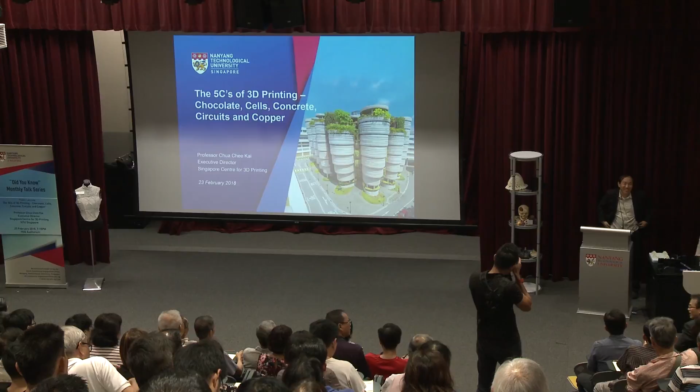So honored, even my junior college friends are here. We go back to 41 years ago, right, Chua? Where's Eng Lam? Oh, Seng is also here. Oh dear, did you bring the whole class here? So sorry, I told them about age already, 41 years ago. Oh yeah, Yang Ju is here too.

So thanks for coming. I hope your time here will be beneficial, that you'll learn something from us about 3D printing. Now, why I've chosen 5 C's is because, you know, when we were growing up, we all wanted our 5 C's.

Condos, cash, what else? Credit card, cars, and country club. So I'm trying to draw the parallel. Today, some of these things we can print. But I'm still hoping to print money, not yet. The moment I can print money, I won't be standing here, for sure.

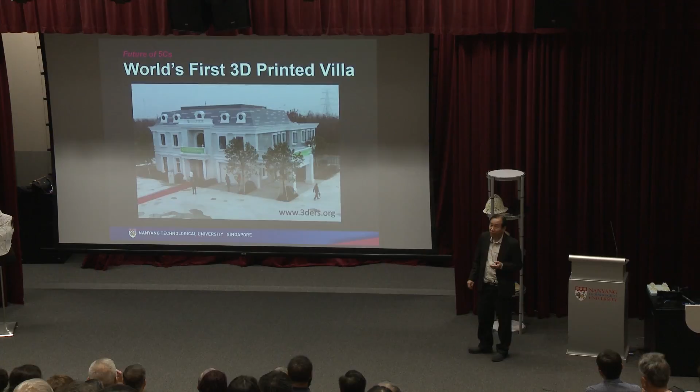Is it possible to print a house? Yes, people have done it. This was done a few years ago in Suzhou by one Chinese company. In fact, I went to see the chairman in Shanghai in 2013 because we just got funding from NRF, the National Research Foundation, at the time. So I was given one of my 3 programs, which is building and construction.

So the chairman, Ma, gave me a quotation in US dollars. Make a guess, how much is the printer he quoted me? Huh? 6 million US. So I shook his hand and said, thank you very much. I left Shanghai.

And that forced us to design and develop our own printers. Today we have 2 of our own printers. We have printed things. So next time you need a customized bathtub, come and see me, we'll print one for you. So this is one of the 5 C's, condo.

So what is 3D printing? We have a very broad cross-section of people here today. Some of you may not even be in engineering, may not know what 3D printing is. So I'm going to bring it down to hopefully your level. It is basically a group of technologies, not one single technology. There are more than 30 different types.

Printing chocolate is different from printing concrete. It's all different. That's why it actually takes more than an hour to explain all this to you. So bear in mind, there are more than 30 different types.

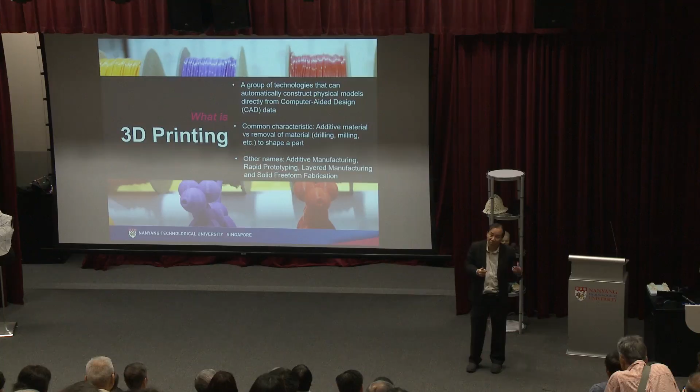What is common though is that you take the data from a computer. You use a software called computer-aided design, and from there you can design a 3-dimensional model. You can use the model to model a house or even a handphone. All things that are tangible, you can model it 3-dimensionally.

Now, before 3D printing started in 1988, there was other technology, namely machining. How does machining work? Anyone know? You have a bottle, let's say, as your design. How do you make the bottle? You take a block of material, you bring in a cutter, and you machine a lot of chips away to get what you want. This subtractive method generates a lot of waste.

Why not use 3D printing when you already have 3-dimensional data? Make them a layer at a time. It is actually very intuitive to use 3D printing because you take that data from the computer and then you manipulate it to make things a layer at a time. Think of anything around the world, everything is 3-dimensional, everything is made of layers, right?

Even a human being, I have skulls as well. This is not scary. Actually, the scary one is when you can print the real person's head, put it on the table, and when your wife comes back at night, sees your head on the table. And there are these kinds of printers nowadays.

They print really lifelike, this apple for instance. So this morning I had a group of visitors who came, I showed them this, and they thought I was really offering them breakfast.

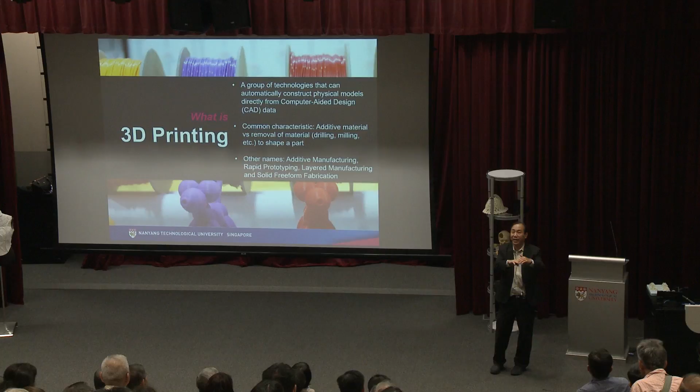So the chosen terminology was additive manufacturing, basically to describe this technology as one that adds things a layer at a time. Somehow, the media favorite is not AM. The media favorite is 3D printing.

Let me tell you a joke. A few years ago, I got my first funding from EDB, Economic Development Board, $9.9 million, and I set up the National Additive Manufacturing Center, AM, because that's the standard terminology. I used that name NAMC because in the US, there was an institute set up by ex-President Obama called NAMII, National Additive Manufacturing Innovation Institute.

So I wanted our name to sound similar to them, NAMC. Then another year later, I got a big grant for NRF, more than $100 million. This time around, I chose the opportunity to change the name of my center. So I fought very hard for the word Singapore. I got Singapore. I wanted institute, they don't let me use institute, so they said use center. Okay, I use center, Singapore Center. But then I realized I cannot use Singapore Center for AM, like my previous center named NAMC.

Tonight when you go back and sleep, you'll probably catch my joke. SCAM is a scam. Hence, I have to choose 3D printing, Singapore Center for 3D Printing. So if you can't remember everything I say, remember the name of the center: Singapore Center for 3D Printing.

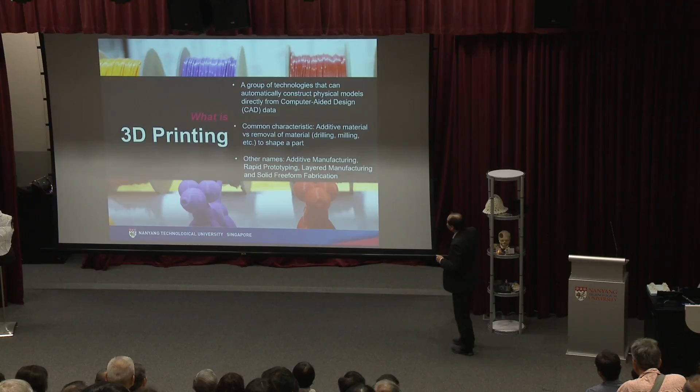Next slide. Now, I'm going to spend a bit more time here to explain to you. I can go on and on about all the advantages, but I just want to highlight 5 or 6 of them. Why is this technology so exciting? It's not a hype. It is seriously something considered by so many companies.

Let me talk about the first thing: making parts faster and cheaper without tooling. Let me show you an example.

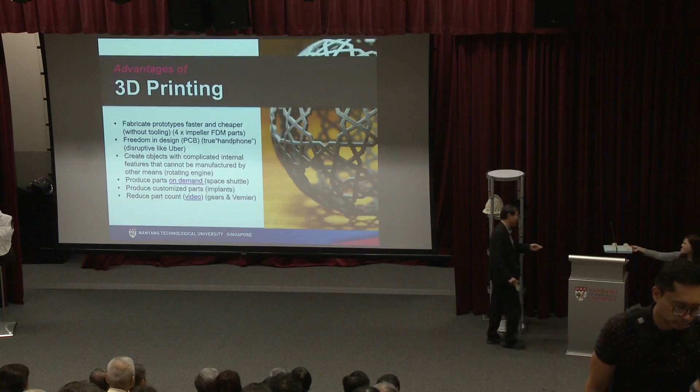Some of you in engineering may know that this is an impeller. To make this by the conventional method in machining requires a 5-axis machining center, which is highly complex, takes a long time to program, and worse still, in order to machine this, you need a fixture, something to hold it, because when machining, the forces are very high. To have a fixture, you have to design it, you also have to make it. Then you can machine it.

When you print it, why so troublesome? You just print it, and I can print 4 at one time, that's it. I don't even need something to hold it. That is the meaning of without tooling. You don't need a cutter, you don't need things to hold it, you don't need to make clamps, you don't need to make a fixture. And that is the advantage of this technology.

Next, freedom in design. Through the handphone example - do you know why your handphone is flat? Because of the printed circuit board inside, PCB.

Printed circuit boards are made by a technology called lithography. A printed circuit board takes about 10 layers, takes about 4 to 5 weeks to make one. The machines cost millions of dollars, but they can only make the thing flat, which is why all your handphones are mainly flat because of PCBs being flat.

So a lot of things we see today have the shape, the form they have, because of restrictions in manufacturing. Think about 40, 50 years ago, a car. Why were cars so box-like back then? Why not with aerodynamics? Does that mean our ancestors didn't know how to design? They didn't know about drag, they didn't know about aerodynamics? They knew - they just couldn't make it.

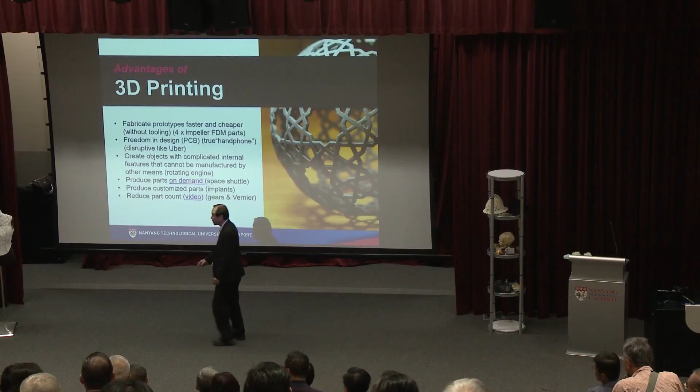Now I want to show you a complex part, right Joel? This is being controlled by my engineer here. This is also one of the very complex parts—an impeller. Almost everything is 3D printed except the motor. These are things aerospace companies are very interested in, because it takes a long time to make things like that.

Printing parts on demand—for instance, for a space shuttle. If you recall, two years ago there was a movie called The Martian. Anyone watch it? No? Our friend was stuck up there, couldn't come back. Fortunately he knew botany from his undergraduate course, so he grew potatoes and came back. But the other option is to bring a food printer with him, then print on demand—when you want to eat, you print, because food is perishable.

Right? Print on demand is a very exciting topic now. I'm going to show you another example. Click, please.

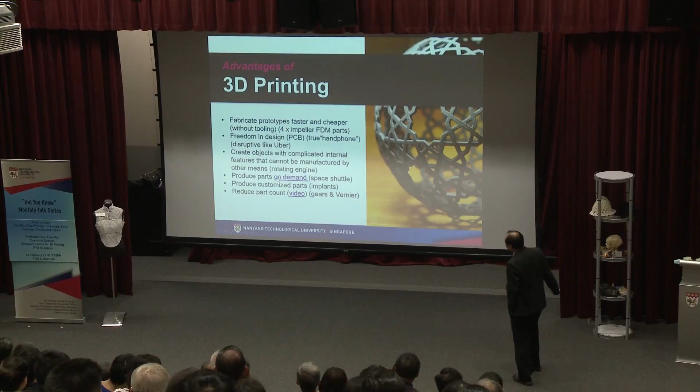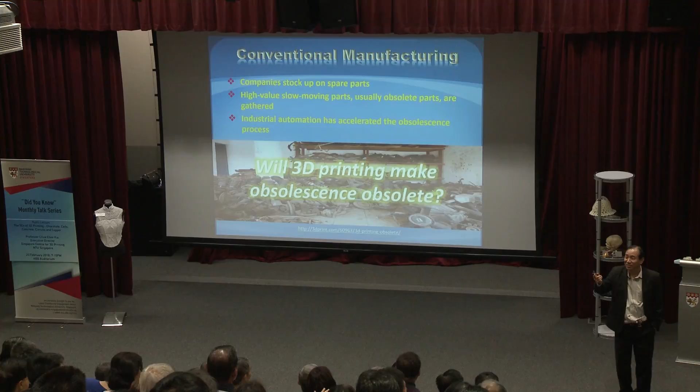I gave a talk a few years ago about this—spare parts. Will 3D printing make obsolescence obsolete? When we launched the center a few years ago, the next day a guy called me because he saw our center mentioned in the Straits Times. He said, Prof Chua, my washing machine just conked up, and when I called the manufacturer, they said sorry, we don't carry this part anymore, it's an old version. So it happens—so you print one part for me. Print on demand.

Right, next slide. A lot of companies have this issue. Same with the Singapore Army—they carry 300,000 different parts, from helmets to rifles to army tanks, in different versions as well. If you keep storing them, you take up a lot of space. So one of the very exciting things people are looking at now is: can I print on demand? If I need it, then I print it, reducing the amount of storage space needed.

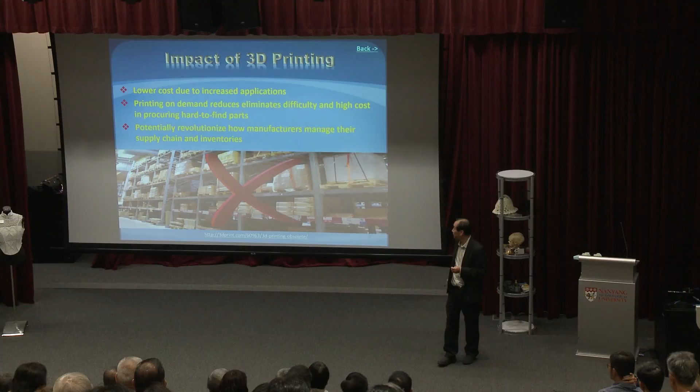Produce customized parts, implants. The world is going towards mass production and mass customization. Medical implants are one of a kind. This is for a hip, a project from a Fortune 500 company from the US—I signed an NDA so I cannot mention the name. This is titanium, lightweight, and customized for the patient. Medical is one big area because a lot of the things are one-off and totally designed to fit the anatomy of the patient. So this is a very, very suitable application for 3D printing.

Last but not least, part count. My view is this is possibly one of the most impactful examples.

Later you can come down and place your order—no, not for sale. One Russian minister came, saw this, was fascinated, and pleaded, so I gave him one. This set of gears, if I tell you it's printed, no big deal—but even top CEOs thought it was just printed, when actually it's printed in one go, fully assembled. That is amazing, 3D printed, full assembly. This vernier caliper—every single part is printed in the printer in one go, fully assembled. That is wow, all this in a single go from the printer. Metals and plastics. I'm going to pass it around, but make sure it comes back.

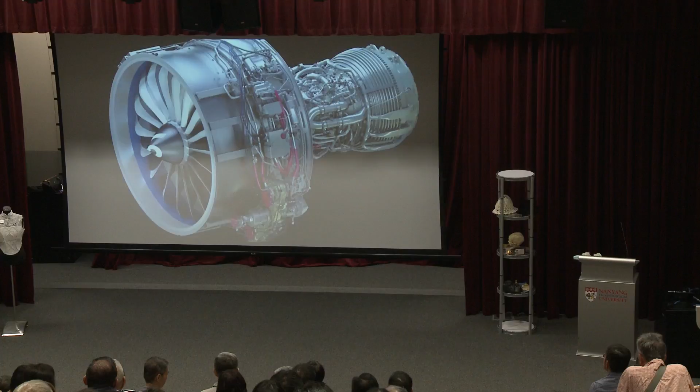In many regards, we look at this technology as replacing, in some instances, traditional technologies like castings, machining, brazing and welding. One of the exciting parts about the technology is we can combine multiple components that used to be brazed or welded together and make them into one single complex unit.

By 2020, GE Aviation will manufacture more than 100,000 additive parts for the LEAP and GE9X engines. In the next 5 years, GE will invest more than $3.5 billion in new equipment to produce advanced components, like additively manufactured blades and blisks.

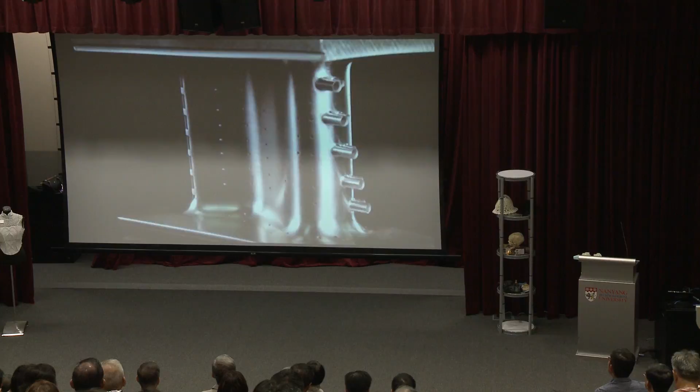To meet its record production backlog, GE Aviation is developing ultra-powerful laser beams and built-in inspection processes that could increase additive manufacturing speeds up to 20 times faster than what's possible today.

The gentleman you saw in the video, I met him in November. I visited GE in Cincinnati. In fact, we did a 1-week tour of Boeing and the FAA.

My mom just called again. Sorry. All right.

GE is basically a leading example of where the industry is going in aerospace. They have now committed the first $100 million to buy 30 printers to print 85,000 fuel nozzles for production.

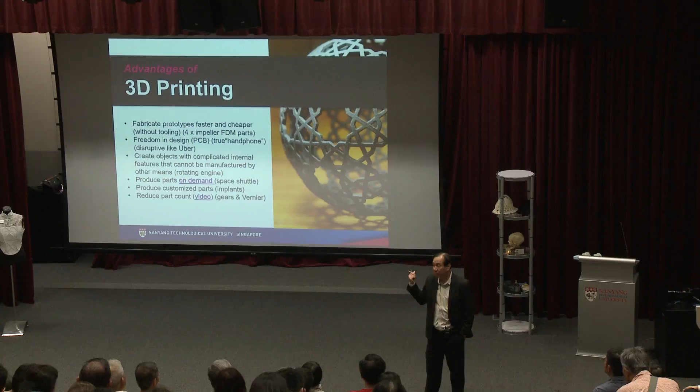So in future, when you sit in an airplane, you will have 3D printed parts. This particular fuel nozzle has already been approved by the FAA, so it is confirmed to be able to fit into the LEAP engine of the airplane.

In this video, the fuel nozzle has 18 parts. They redesigned it and now print it in one single go.

So when we were there, we asked him, what happened to the 18 companies that made the previous part? They said it's their problem. No more job, seriously. They are very ruthless. Out there it's like that. So the subcontractors are gone.

So it's really disruptive. But this 18 is nothing great, because when we walked into a lab, we saw another one: 800-over parts reduced to 20-over parts. Wow, that one is fantastic. I cannot take a photo and show you because they don't allow us.

But this is what's happening in some of the leading companies around the world, in aerospace.

Oh dear, my mom doesn't give up.

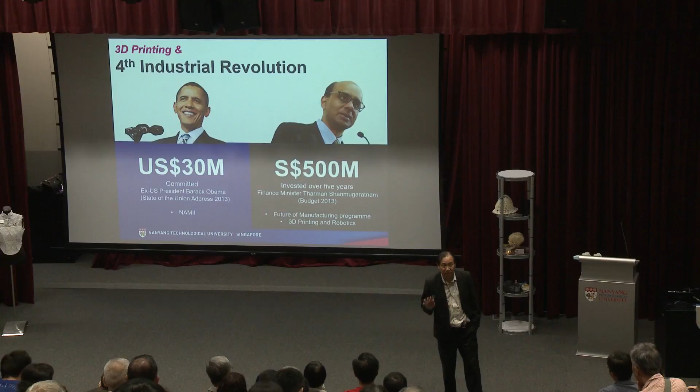Since then, many governments of the world have put in huge investments - China, Taiwan, Canada, UK, and so on and so forth, including us. So it is now really part of this fourth industrial revolution, among the many things like robotics, Internet of Things, cybersecurity, and so on and so forth.

Next, so what can we print? Almost all the different materials that you can see here, including even circuits.

I mentioned about PCB just now, right? 10-layer circuits and flexible circuits as well, so you can have wearables.

Most of what you see here, we can print in the center. Okay, next.

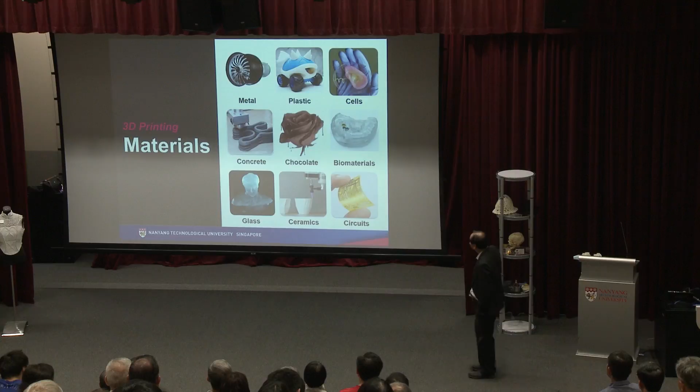Let's talk about chocolate. We have a chocolate printer here, but today I didn't bring any printer. Neither did I bring any chocolate. Play the video, please.

Earlier, I got a glimpse of the future with these unbelievable 3D printed creations: fashion, statues, medical implants. But Professor Chua has even more to show me. What could possibly be next?

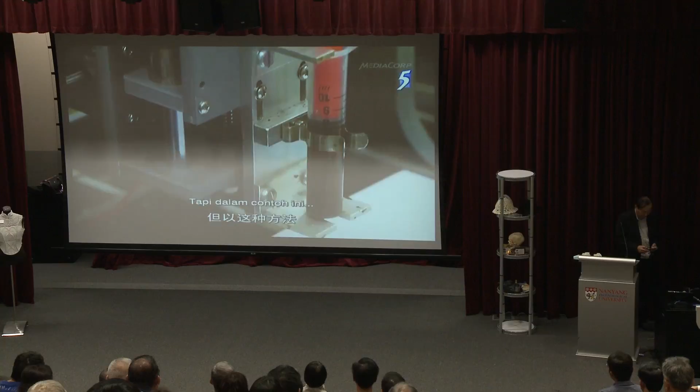Is this chocolate? Yes, and it's printing a design now. What's the difference between this chocolate printer and usual chocolate making machines? If you go by conventional ways, they usually need a mold to pour the chocolate in, so you have to make the mold. But in this instance, we print directly without the need of a mold.

Can you put any other ingredients in there? Well, in this instance you have only one syringe, but if you want other ingredients, or what we call other inks, you need multiple heads. Once you have multiple print heads, you can control each individually to print whatever materials you want on top of the chocolate.

So this actually looks like a prototype printer. Are you planning to sell this chocolate printing machine? Not yet, we still have certain challenges to improve it. If we can do multiple materials, it will be one of the first in the world to go into cake making, for instance.

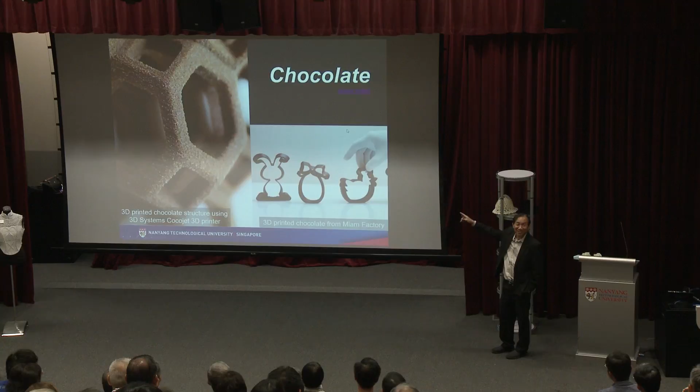Do you recognize her? Jiu San San? When she came to my center, she was the celebrity, not me. All my researchers asked for her autograph.

This was a program filmed 3 years ago called Secret Singapore. Anyone watch it? They came to our center, spent a whole day, and it ended up just 15 minutes. But not bad, 15 minutes on national television.

It's quite good. Now, we are also into 3D printing of food, but let me explain what people are doing around the world. Freeform design, they think maybe you can print decorations for cake. I don't know, they can do it.

Can we customize nutrition, amount of proteins, amount of vitamins into a design? I suppose we can as well. NASA is looking at long-term space travel. You need food, you print it when you need it.

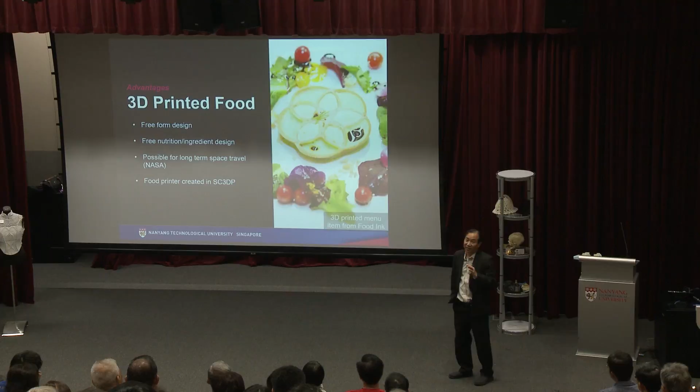We are also getting into the act of 3D printing food. We are developing our own printer. Next slide. This project was initiated by the chief dietitian of Khoo Teck Puat Hospital, Gladys.

She came to me because today stroke patients, as well as the elderly, have problems swallowing or digesting some foods. So if you can only eat porridge, your quality of life drops. What we're hoping to do is print pureed food, so there's no compromise on quality. You get your steak, potato and vegetables.

It also looks good and appealing. If you look at it, you actually can't tell it's pureed. So it looks good, tastes good. Have a look at the video.

The powder first. So this is pureed form. Is this correct? I have to do it a little bit because you didn't give me a dosing spoon.

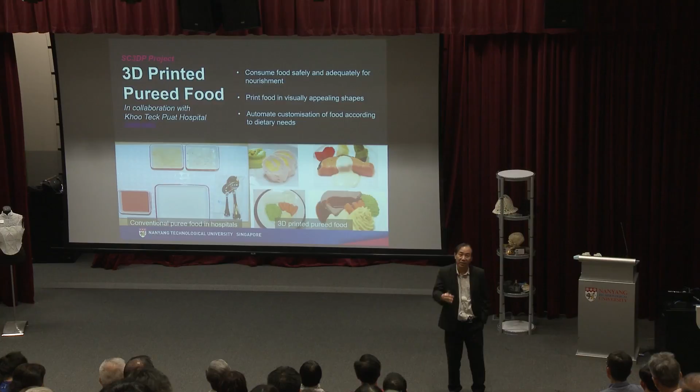So her vision is that hopefully in 2 years' time when we are ready, we are developing our own printer because we want to keep the cost down. If you buy printers from elsewhere, usually they cut your throat. So if we can get this done, we are even thinking of production in 2 years' time, supplying to nursing homes. If they need, they can choose from a catalog and we supply the food. So this will help address some of these issues.

Cells. This is possibly among the 5 C's, one of the greatest needs. Today, people are dying because there are not enough organs. They have to wait in long queues, and even then, sometimes the person dies, there's no match.

The organ is rejected by the recipient. So somewhere in the 1980s, the topic of tissue engineering came about, around the same time as 3D printing. Then in the 1990s, they kind of crossed, because 3D printing can help print some of these constructs, building an environment where the cells are so happy they multiply.

The idea is to take cells from the patient so there's no chance of rejection, but the environment, or the thing you want to print, can be designed and printed. Today we have a printer with 8 print heads. I can put living cells, biomaterials, growth factors, to construct this three-dimensional matrix of cells that allow and promote growth. This can then be implanted into the human body.

So we are doing things like cornea, cardiac, esophagus, skin. You want beautiful skin? We're doing quite a few of these. In bioprinting, we are ranked number 2 in the world. Later I'll show you some of these numbers.

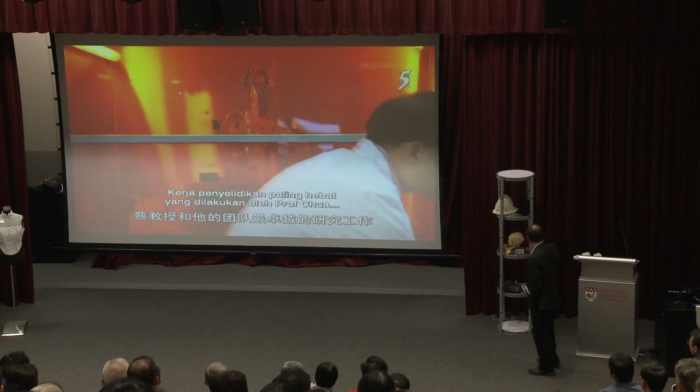The most remarkable research work being done by Professor Chua and his team is in the 3D printing of human tissues like cornea, heart, and esophagus tissue. If they succeed, it will be revolutionary, and the 3D printed human tissue could be used instead of animals for testing new products.

We can use it for making drug models to test drugs and chemicals on, and this will allow us not to use other types of living models such as animals.

The research team is exploring the possibility of printing transplantable tissues and organs, but they have some major hurdles to overcome. Right now, the main challenge is to develop vascularization. Those blood vessels are usually much smaller, and we can't really just print them out.

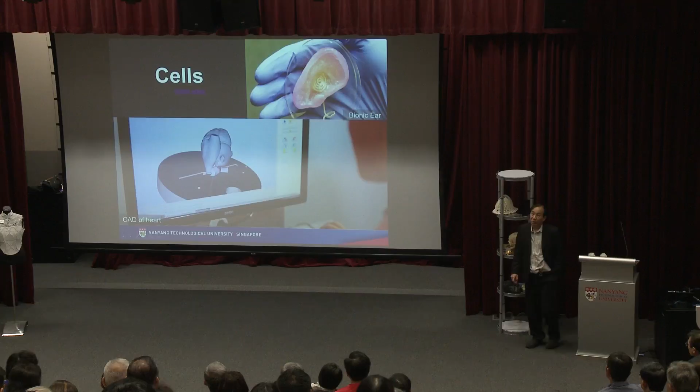Printing organs is very challenging. Printing something that looks like a kidney - it's not about the geometrical form, it's about the function. So we have to work with our friends from CELSI, the biologists. The doctors come in because of the endpoint application, whether you print a liver or another organ. The five major organs are the most challenging.

My estimate is probably not even in the next 15 years will it arrive. But the day it does arrive, I think there will be a lot of black market selling of organs out there.

This is our printer that we have, 8 print heads, cost us $1 million. And one of the greatest impacts, in my own view, is in drug discovery.

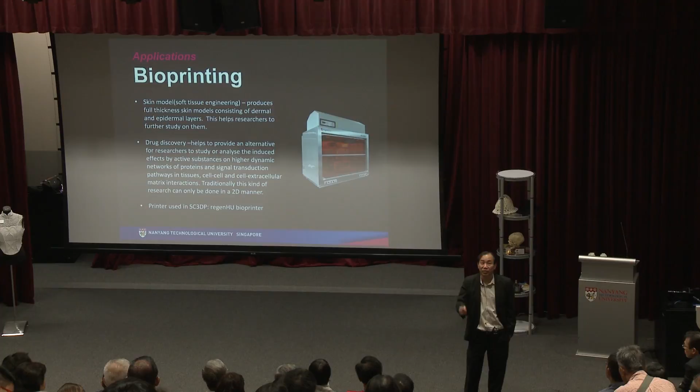Today, for every 50,000 drugs tested, only one makes it successfully. The process of testing drugs to make sure they're commercially available is very tedious and long, because they need to do animal and human trials. Our idea is perhaps we can use bioprinting to print the tissue and do all the necessary tests instead of the tedious testing process, which could shortcut the process, and hopefully new drugs will be introduced faster into the market.

By the way, recently one of my PhD students developed a new ink, and we've actually gotten a company interested to buy it from us. So that's one of the things where whatever IP we generate, we hope that we can get some income back.

Okay, concrete. So this is my colleague and his team.

If you need a bathtub, a swimming pool, or other things you want to print - Sembcorp invested $7 million into our center. Sembcorp has a unit that looks at design and construction, they have actual architects, very different from Keppel. Keppel Land is more about development, while Sembcorp actually develops houses. So they worked with us for 6 months to see what we should print.

Now remember, not everything should use 3D printing - don't jump into it and do things blindly. At the end of the day, it should still be cost effective. Yes, it's faster, it's nice, but it must still meet all your requirements. If you print a house that collapses on you, we're in big trouble, or you print a plane part and the plane goes down. So safety, reliability, and quality issues are all concerns.

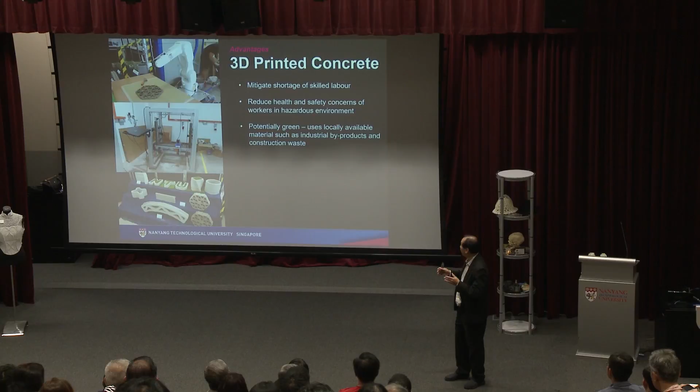In building and construction, we're now doing quite a fair bit of work. One thing you can see is that in Singapore, we rely heavily on foreign workers, and productivity in Singapore is low compared to Japan and America. This is something we want to address through automation, robotics, and 3D printing, hence this project.

So we have developed two printers, one using a robot, another a gantry system, and these are the parts we have printed. Let's watch the video.

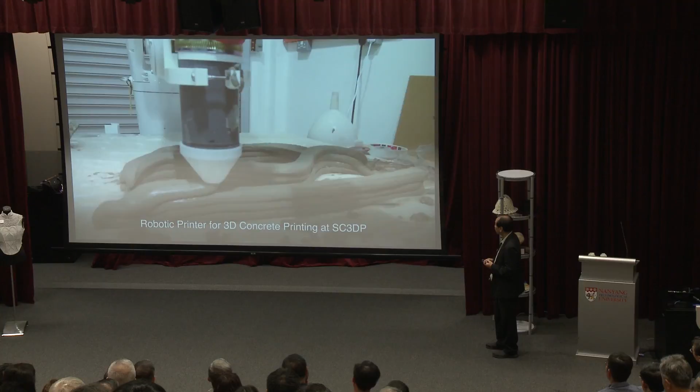All right, next - circuits.

This is the latest industry that we've added to our center. Even though it just started about a year ago, today we have about 12 PhD students working on this. We are printing things like sensors, antennas, and RFIDs.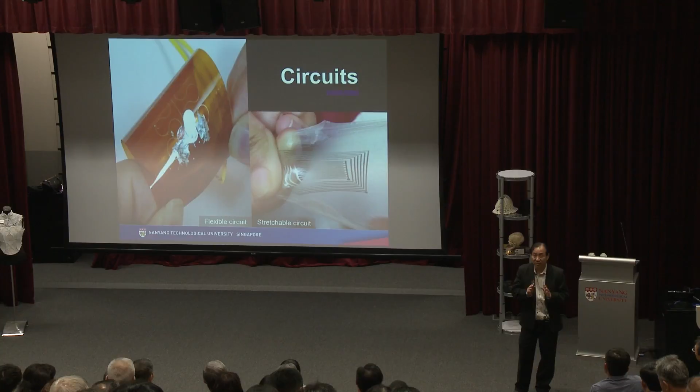But electronics is a huge area - there are still things like PCBs, transistors, resistors, batteries, fuel cells, a lot of things to print. Some are easier, some are harder. Right now we have 2 printers, and these are some of the things we've printed.

Flexible circuits, stretchable circuits - let's show the video. So this one is an antenna.

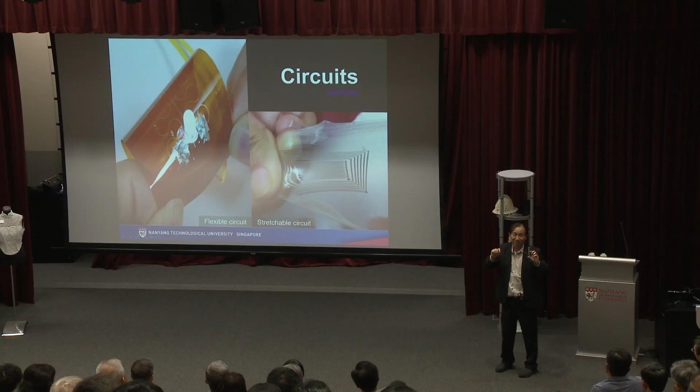Silver nanoparticle ink. If you contrast this and the earlier one, you can see the dimensions are hugely different. This one is nanoparticle, 10 to the power of -9. The concrete layer is very thick, probably a few mm, very different. In construction, being a bit off is fine, the tolerance is very big. But in some of these areas, even 0.5 microns is an issue. So different kinds of things you print have different requirements.

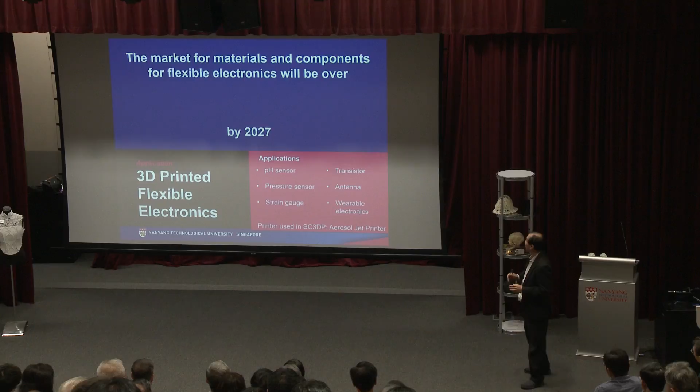And electronics is huge, 600 million by 2027. These are the kinds of things that people are looking at to print. Next.

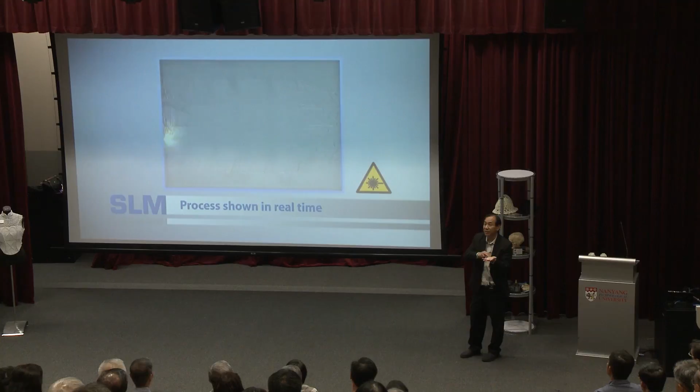See the laser running around? As the laser goes across, it's actually melting the powder, and the powder fuses together. This is how you get one layer. Very fast.

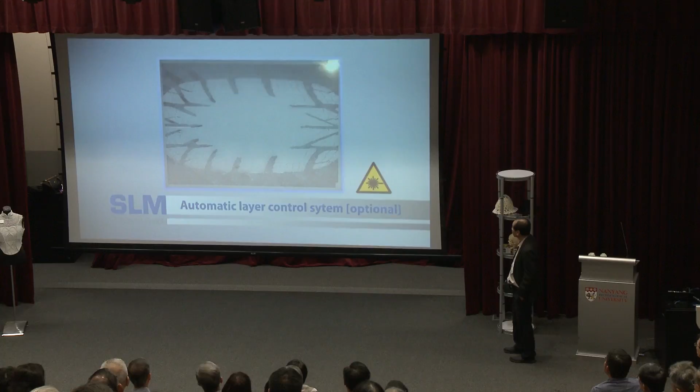So you see all this powder form? You remove all the loose powder, and that's the part that you print.

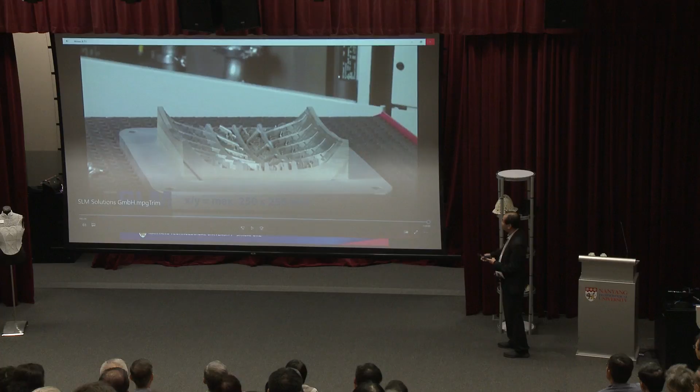So actually metal is the hottest topic in the last few years. It has advanced a lot. In the past, like 10 years ago, metal was nothing to shout about. But because it advanced so much, a lot more companies are coming into metals. In Singapore, actually, we make more plastic than metal parts. But the number of companies, number of PhD students, number of projects are in metals more than polymers, interestingly. So the world over, they are using metal machines to print all kinds of stuff: medical, nuclear, turbine blades, oil and gas, jet engines, so on and so forth. Even rockets. I visited a company in the US, they make rocket parts using additive manufacturing, 3D printing.

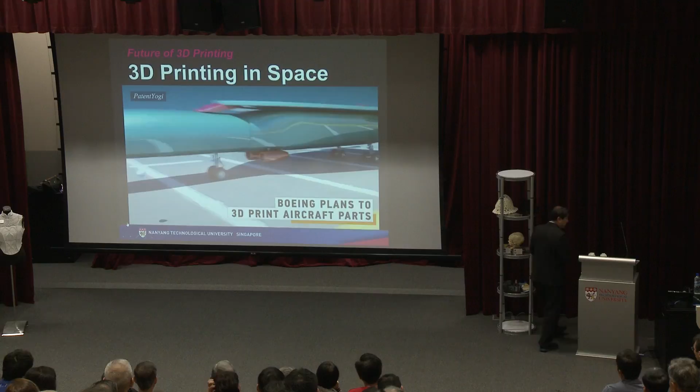4D printing, another very exciting area. You know 4D, on a weekend you queue up... that is gambling. Don't do it. If you want to bet on 3D printing, don't bet on 4D.

4D printing, not 4D. 4D printing is the combination of three-dimensional printing and what? Anyone knows? Time, that's right. The fourth dimension is time. The materials we use are shape memory polymers or shape memory alloys. This material has a special characteristic: if you subject it to certain stimulus, it transforms from shape A to shape B. So you can actually pre-program it. Then you can use heat, moisture, acidity, or one of these stimuli to transform it. Very exciting. Some years back, a journalist asked me, what's the application? I said, okay, when I lie down on my sofa, it detects my heat, and it transforms to fit my anatomy.

But this one is for fun. The real one, for instance, is a smart sun shade. Put it at the office. When it's very hot, it actually moves to limit the light coming into the office. Then when the sun sets, it goes back to its original shape. No need to use your hands, no need to move the blinds, no need for energy, no electricity. Government loves you.

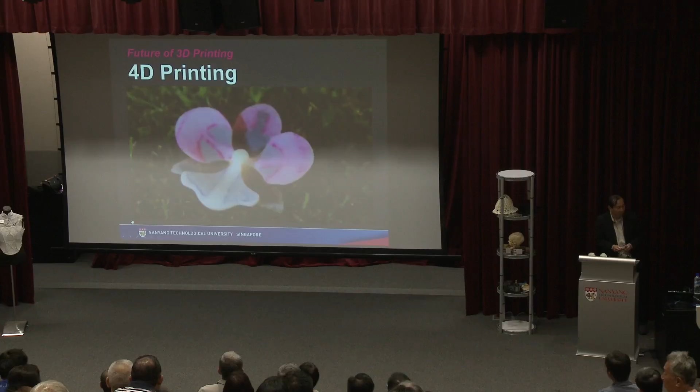When we first started this work about 3-4 years ago, the earliest center we launched had as guest of honor Minister Lui Tuck Yew, who has now left politics. He came, we gave him a polymer, he put it in hot water, and it straight away changed into the letters NTU due to the heat from the water.

Single, almost like two-dimensional - if you think of a piece of paper, I can design it such that it forms different shapes, like origami. This is what the flower is. You can actually sequence the way it forms - it moves here first, then moves there. And all this can be done by 4D printing. So actually we use multiple materials, different materials that react differently to the stimulus of heat. So you can program one shape into another shape. If you stretch this to the limit, it's like Transformer, the movie.

So this is another very exciting thing that people are doing. We are doing the science to understand the behavior, and if possible, quantify it, and then you can look for applications.

Next - well, we are a university, so we have a lot of undergrads, and one of the things we do is competitions, since students love competition. This was some years back - they took part in a competition. They were thinking, why not 3D print part of the car, not the entire car, just the shell. We used a very small printer, the one at the back, and that's why we had to print 150 pieces of it and stack it out. Guess what - my colleague became famous. He was interviewed by CNBC, CNN. I'm going to show you the video, hopefully it works, from CNN.

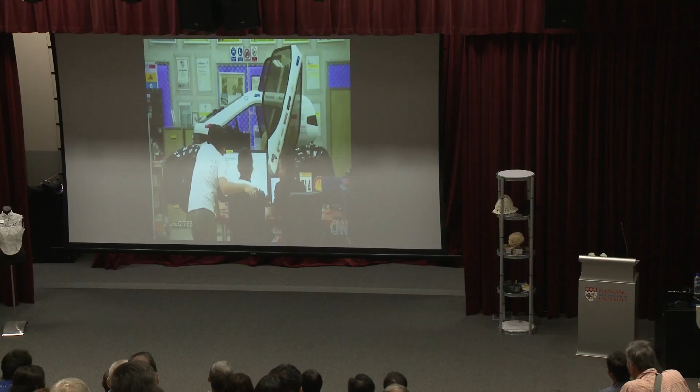The final leg of our journey across Singapore takes us back to school. The students here are mostly engineers, but this is no ordinary classroom - instead, it's a place to experiment. The general rule of thumb: the more hands-on, the better. It's not a full-time project, it's like a project of love, really, and a project for the future. A solar-powered electric car designed and built entirely by students. The team at Nanyang Technological University has done this before, but for their 8th concept car, the NV8, instead of ordering the parts, they printed them.

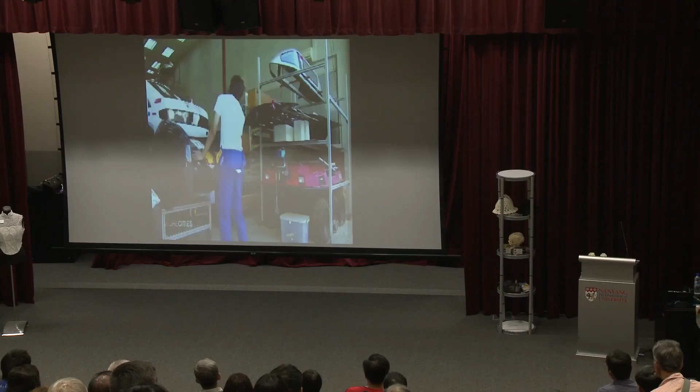So anything white - some of these components are also 3D printed. Basically it's the cabin, if you like. It's a process that required extreme precision with 150 pieces of custom printed plastic, but also extraordinary patience because the printer took 3 months to finish the job. Is 3D printing a viable way of building a car? We wish they could print one piece, like this front piece, but you'd need a bigger machine. Still, the plastic combined with a carbon fibre base means this car is extremely light, about 120 kilograms without the driver - perfect to go up against energy-efficient rivals dreamed up by other universities across Asia.

Oh, you stopped it - you don't have the next part where you drove. Oh okay, actually the video went on to show the CNN guy driving the car in our sports complex.

He survived. His only complaint after he drove one round was he asked, where's the air conditioning? It's too hot. Anyway, this was one of our earlier ventures, and at that time, because we only had a smaller printer, we had to print many parts. Now we have a much bigger one.

Next, let me share a little bit about my center. So in terms of the 5 Cs, I think we have done almost all the different Cs.

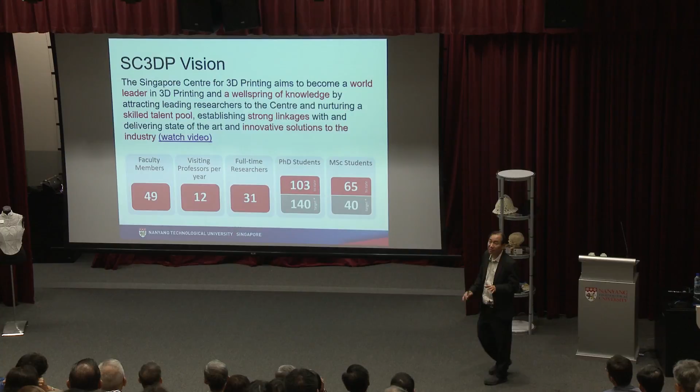The Singapore Center for 3D Printing aims to be a leader in 3D printing worldwide - not just good in Batam, Johor and Singapore. We hope to be well known all over the world.

We have a video as well? Okay, let's show you the video.

The Singapore Centre for 3D Printing, or SC3DP, funded by the National Research Foundation, the Nanyang Technological University, and industry partners, aspires to be the world's leading research institute in 3D printing, achieving prominent breakthroughs in research and development of innovative 3D printing technologies, processes, and materials. This will be done by attracting leading researchers, nurturing a skilled talent pool, establishing strong linkages with industry, and delivering state-of-the-art solutions.

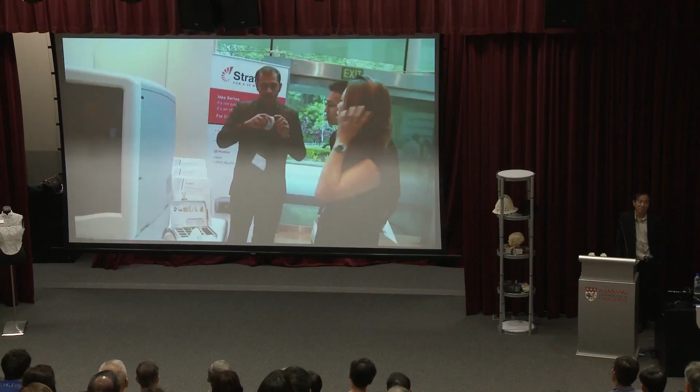SC3DP will consolidate all of NTU's existing competencies and strengths in 3D printing for manufacturing and precision engineering industries. Led by a strong team of professors renowned in 3D printing and supported by more than 30 faculty members with different expertise, it has 3 key research capabilities: modeling, materials, and design. The center also houses a wide range of facilities and equipment and has received strong financial support from the government to further its research.

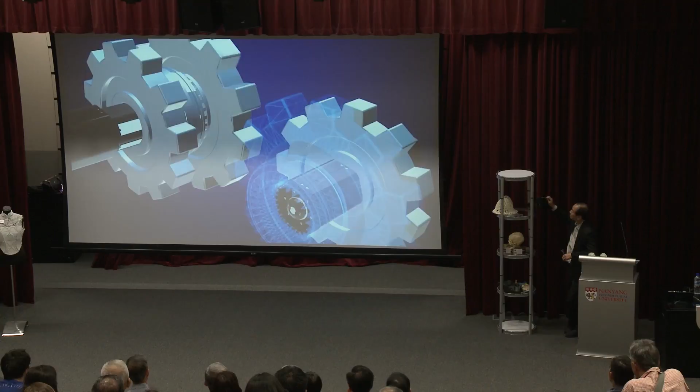In collaboration with industry partners, SC3DP will focus on key industries including aerospace and defense, building and construction, marine and offshore, and future of manufacturing. The center also actively collaborates with local and global partners, from equipment and materials manufacturers, software companies, to certification bodies.

In 2013, a 5 million Singapore dollar joint lab was set up between NTU and SLM Solutions Group AG, which aims to develop the next generation of metal 3D printers.

SLM Solutions, as the technology leader, is very proud to collaborate with NTU, Nanyang Technological University. We decided together to form a joint lab to have research and development. The common research is especially of high interest for the aerospace, automotive, and energy industry.

We at UL are delighted to partner with the Singapore Center for 3D Printing. We selected the Singapore Center for 3D Printing because of the infrastructure, resources, and the commitment from companies to advance 3D printing. There's a lot of research that's needed for us to understand the science and the safety behind the materials and the processing of 3D printing.

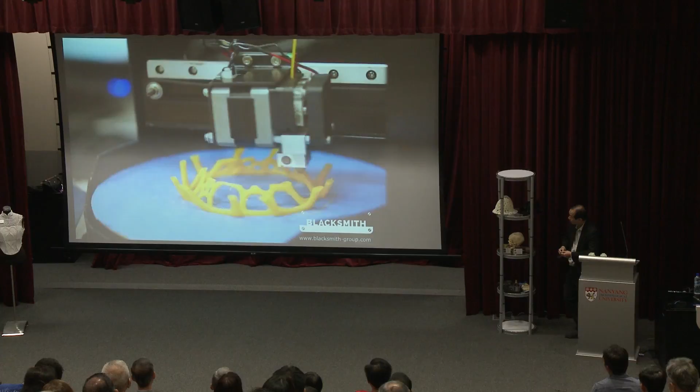Besides working closely with industry, SC3DP also prides itself on developing spin-off companies and products. Blacksmith Genesis is a spin-off product from SC3DP, invented by the Blacksmith Group, Singapore's first all-in-one 3D scanner, printer and copier. The centre organised 3 firsts in Singapore in 2013.

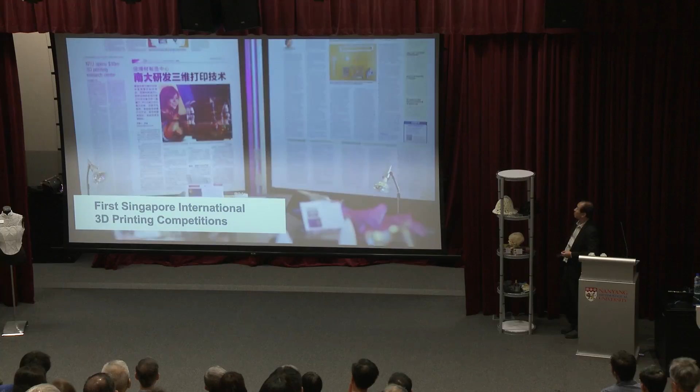The first 3D Printing Festival, the first Singapore International 3D Printing Competitions, which saw a total of 30 entries from 7 countries, and the first 3D Printing Fashion Show, which featured competition submissions and fashion pieces from renowned designers.

With its mission to train a pipeline of researchers and practitioners for sustainable growth, SC3DP offers a range of postgraduate programs supported by NTU School of Mechanical and Aerospace Engineering. The centre aims to train at least 100 PhD students and 27 full-time researchers in 10 years.

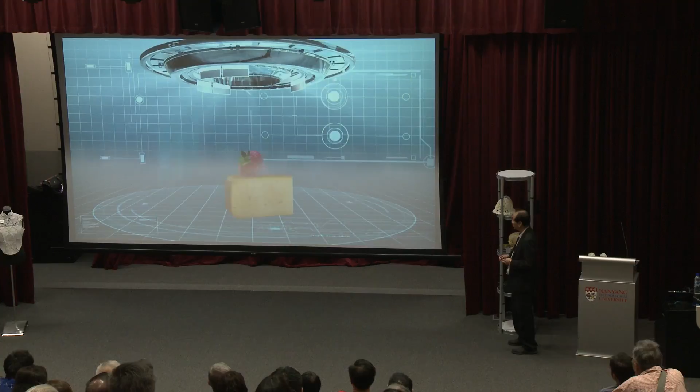The research work at SC3DP will bring about endless possibilities in 3D printing, or even 4D printing. Cars, clothes, food, medical implants, human organs, smart structures, printing in outer space, and unimaginable applications can be researched upon and 3D printed in the near future. The Singapore Centre for 3D Printing, printing the world and beyond.

We have today in the center 49 professors where we draw faculty from all over the campus. We have people working in construction materials, helping us with the building and construction program. We have people from biomedical working with us in bioprinting. We have material scientists who help us with all the formulation of materials. So the idea is that while there are colleges and schools, there are no boundaries. Any prof can work with us in the center.

We also bring in visiting professors. There are some people who will not join full-time, but don't mind coming for a short period of time. This community is not that large - we almost know everybody after 28 years. These guys will come for a couple of weeks, we pay for them, they spend some time, hopefully to inspire our researchers. So almost all the top gurus in the world, we know each other.

Full-time researchers, we have 31 of them, mainly postdocs. PhD students, right now we have 103 PhD students, concurrently doing all work on 3D printing. This statistic alone should make us the largest center in the world.

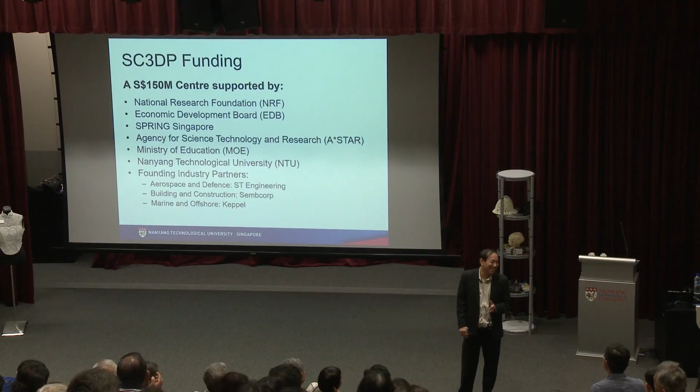But I'm still very poor, I don't know why. Anyway, we have a lot of funding from government, but also from industry. Out of the 150 million, 30 million is from industry. These are our three major partners, very specific areas, we get them involved. Later I'll show you some other companies from around the world as well.

These are all the printers that we have. Today there's no time to show you, you did see some in the videos. But should you want to come back, let me know, let my girls know, let my guys know, we will arrange for you. Don't worry, I don't charge you. Come and visit. The machines are very expensive - no point buying expensive toys and they become white elephants.

It is important for us to work with industry. So the government has already invested, we will use that machine to do your project. So that's our in-kind contribution. So if you have a problem, come to us.

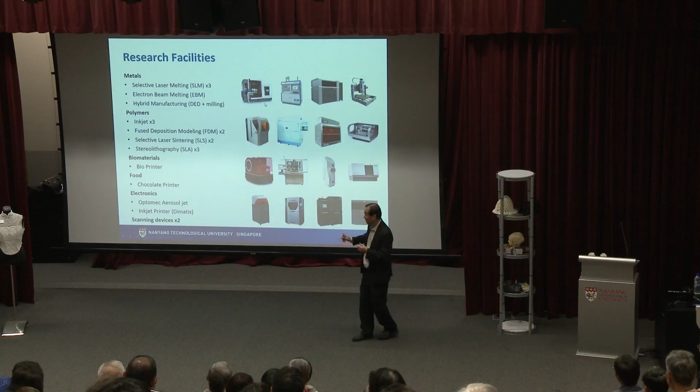I can tell you how expensive this machine is. Most of them are 7-digit. Only the chocolate printer is 7,000 - just 7,000. When 7,000 is compared with 7-digit, 7,000 is very cheap, right? Very expensive machines - that machine is more than 2.5 million, that one is 1 million, this one is 1 million, that's 1.8 million, this is 2.5 million. They are all very expensive machines.

The lifespan of the machine is very hard to estimate because they are all so different. But let's say the first one I bought in 1990 - that's the year I started my journey in 3D printing - we used it for 8 years, the SLA. 500,000, 8 years, hundreds of projects. Worth it. So different machines, different lifespans.

Now there are also very cheap printers out there. As the Chinese saying goes, 一分钱一分货 - you get what you pay for. You can buy from Taobao a $300 machine, but don't expect it to function like the $3 million machine. If you can make it work like that, tell me, I also want to know. So bear in mind, if you can print nice titanium, let me know. These are the real industrial grade machines, otherwise the companies will not come.

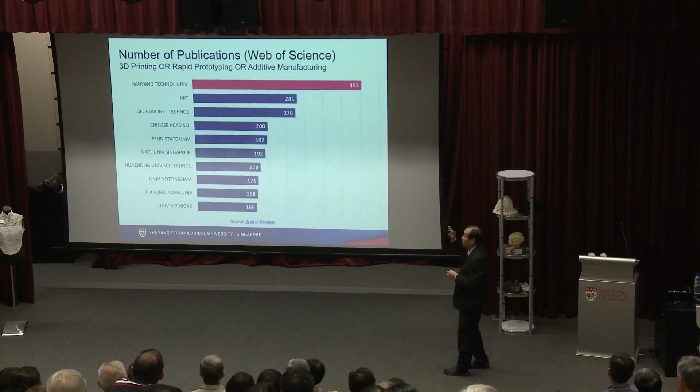Oh, by the way, what you see are commercial printers. What you don't see are printers that we develop - that one we don't show you. And sometimes companies give us money and tell us not to do anything public with it, so it cannot even be open public domain. I'll show you some examples.

Now, I hope you don't mind we do a bit of bragging. After, they can bash me up.

In the world, if you look at publications in Web of Science, the de facto database, and you use the 3 keywords - in the early years it was called rapid prototyping, later it was formalized as additive manufacturing, but today everybody prefers the word 3D printing - use any 3 of these keywords, search in the database, NTU is right at the top. We are more than double our friendly neighbors down the road. But I don't push them down because I got 2 degrees from there, more than here.

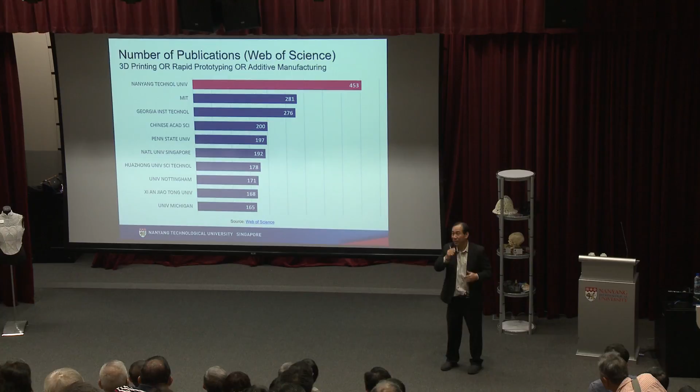I'm just saying as a matter of fact, nothing wrong with NUS. The top 3 has not changed in trends - I monitor the trends as well. Last 3 years, always the same top 3. 4th to 10th goes up and down like the stock market because they are very close to each other. So this is where we are. What about individuals? Next slide.

Okay, therefore we have the next slide, which for sure you will laugh at.

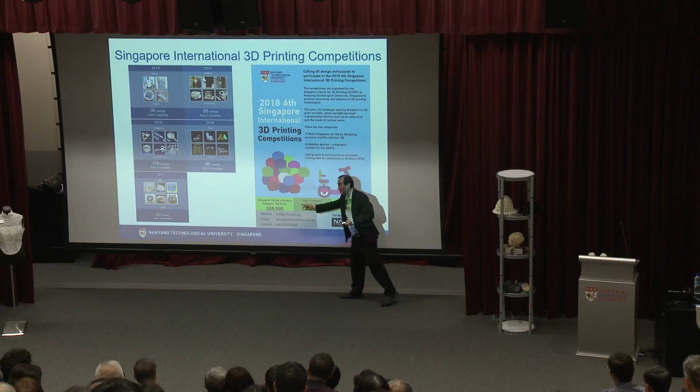So we started in 2013 because back in 2012, one guy came to my lab, an investor, really rich. I didn't expect him to give when I asked, but he gave me $60,000, seriously, to start the competition. So we started it, and since then we've been doing it every year. $40,000, because I even created the Singapore category - two categories for students, tertiary and even primary school, of course printed by the parents. 5,000 for Singapore students, and worldwide it's 10,000 - 20,000 for one team, another 20,000 for another team. So every year I give away $40,000.

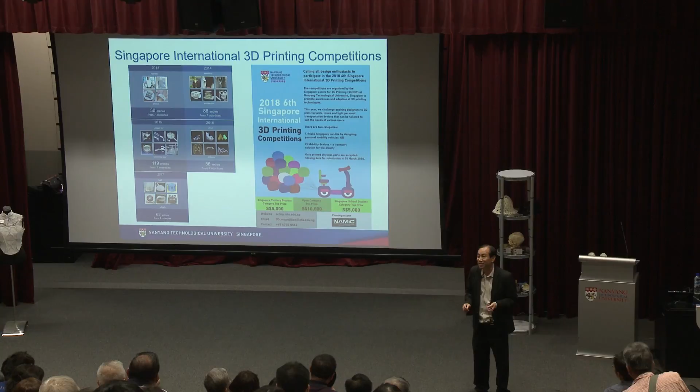And the guy who started all this in 2012 recently came back. It's just strange, he just came back. So I said, hey, since you came 5 years ago, a lot of things have happened. He came, I showed him what we're doing, blah blah blah. I said, oh, this one we got sponsored, you don't need to sponsor, everything. Then before he left, he said, I still want to give money - give me $50,000. Sorry, he gave the center $50,000. I wish he would give me $50,000, but it was for the center. But the good thing is that you do whatever you want with the money. That's very nice, but you appreciate the work that we have done. That's the good news - I'm not hinting that you should give me money, but you want to give, also can.

This is a course that I've run since 1991. Can you believe it? I've run this course for 27 years, so when I teach it, I can close my eyes and teach. After a few years running it, I said I should write a book, so my first book was in 1997. Last year I published the 5th edition - every few years you have to rewrite. This job is very tiring, we call it in Hokkien 'he chuan'. It's very hard to catch up with this technology - every day there are new developments, seriously, it's real.

So this course right now is supported by Skills Future. It used to run only twice a year, sometimes a class only filled 10%. The last course I ran in January had 50 people - why? Because you get the subsidy. If you're from an SME, the course fee is 1,600, subsidy is 1,400. Because you're away for 4 days, they pay you 210. At the end, you not only pay nothing, you make $10. SMEs here, anyone? Make $10. And you get 4 lunches, because it's a 4-day course, 8 tea breaks, and very good food from Four Seasons. Get a souvenir, get a certificate, get a copy of my book - but autograph cannot, because that's $3,000. Very popular course - if you're interested, we even have registration later.

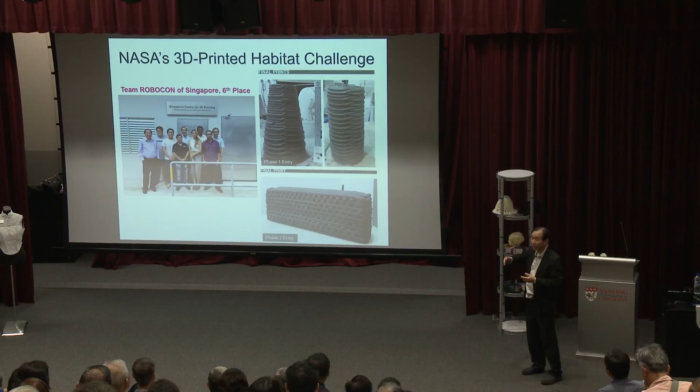But there are two things we don't print at the center. One is money, of course. The second, we'll show you in the video. We don't print guns, we don't do weapons.

My name's Eric Mutchler, I'm a project engineer here at Solid Concepts, Austin, Texas. This is the location where we hold our federal firearms license, and we've just produced our first 1911 pistol via DMLS. The slide, the frame, and many of the internal components were made out of stainless steel 17-4 DMLS product. A couple of items were made out of Inconel 625, such as the mainspring, the beavertail, and the hammer, and we did SLS on the grips. When we decided to make this gun, we weren't trying to figure out a cheaper, easier, better way to make a gun. That wasn't the point at all. What we were trying to do was dispel the commonly held notion that DMLS parts are not strong enough or accurate enough for real-world applications.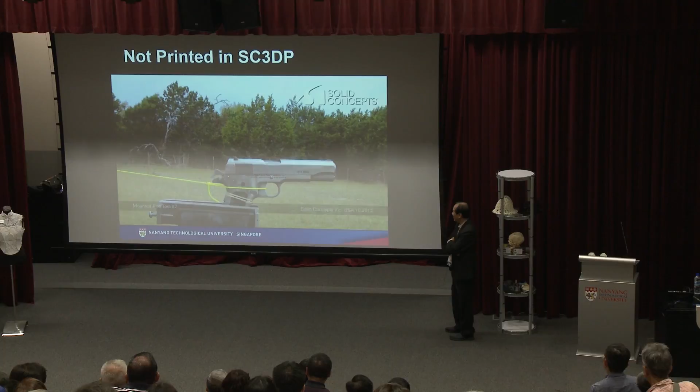She's hot. Why did he use a rope to pull? 3, 2, 1. Get it in his face, huh? 3, 2, 1. Well, it works, huh? Looks like it went over the berm. So after 2 shots, he feels safe enough. First 1911, it's all DMLS except for the springs. So we're gonna try 3 rounds, 45 Winchester white box.

Accurate or not? You think it's accurate? Not accurate. How do you know it's landed not on my shoulder and stayed there till my third shot. No, I was watching... Accurate or not? Want to buy the gun or not?

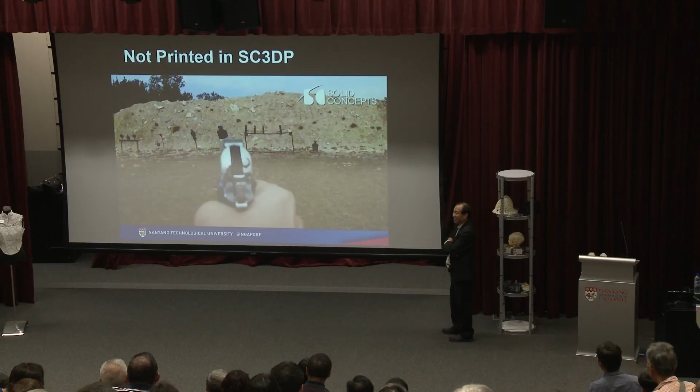This one is forbidden. I have police advisory, no guns. So I told my researchers, don't print weapons. Don't get me into trouble. So no weapons in the center.

I also told researchers don't do anything sensitive to racism, religion, as well as pornography. And it's happened in Japan twice. Once, two guys printed a gun, they ended up in jail. Then a short time later, a lady designer took a photograph of her own private part, designed it into a model, 3D printed it, and guess where she landed up? Behind bars also. Also in Japan, I don't know why. Strange things all happen in Japan.

Next, money. Money I haven't learned how to print, but if I know, I'll tell you.

Next, let me tell you what we really don't know. A lot of things we still don't know. We are barely at the surface. We are really new to 3D printing. Today, people are trying to do all kinds of things. We are only at the tip of the iceberg. There are many challenging things, including human organs. We are very far away. And every day, even though I've been involved for 28 years, I'm still surprised by people. They try to do all kinds of things. Recently, I saw one, this guy printed a stingray.

So silicone to build the body, inside got rat muscles. And this stingray can swim because they use light. And because of the light, it's 4D printed. Rat muscles, it reacts, it swims. This is not your Newton Circus stingray barbecue. I know you're hungry, but this is 4D printing, another example. I tell you, it's amazing what people are doing out there. Every day there are new things.